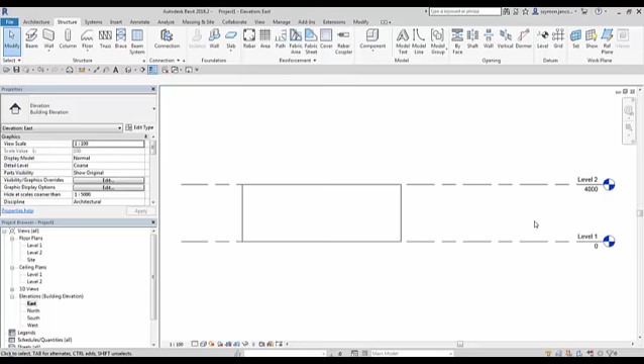In this video tutorial I would like to show you how to create a structural beam. I have drawn 4 walls that are going from level 1 up to level 2, and I will draw structural beam on the level 2 floor plan.

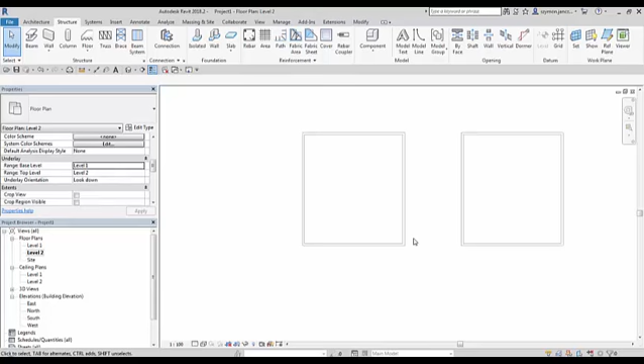I go to structure. Now I see on the view an underlay of level 1, which is listed under here. I can turn it off, but I will turn it on in order to see the walls from which the structural beam will span. So I select the beam, and I see that there's only W shape already loaded into the project.

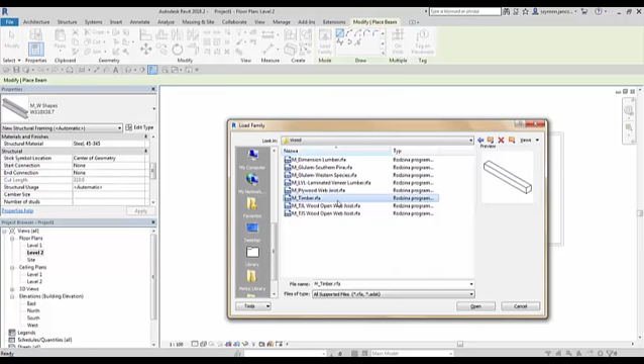So I go to load family and search for structural framing catalog. I go to wood and select M_Timber. The profile is rectangular. I will not pay attention to the precise size of it, so I select a random one and click OK.

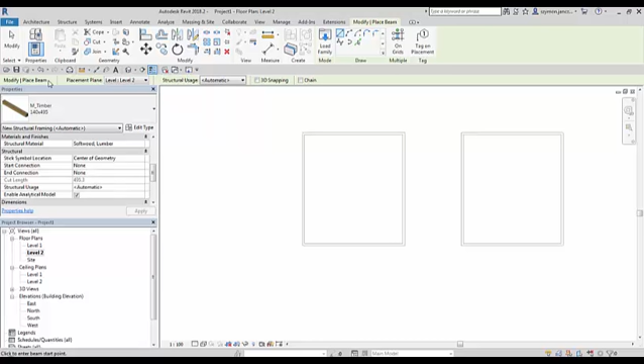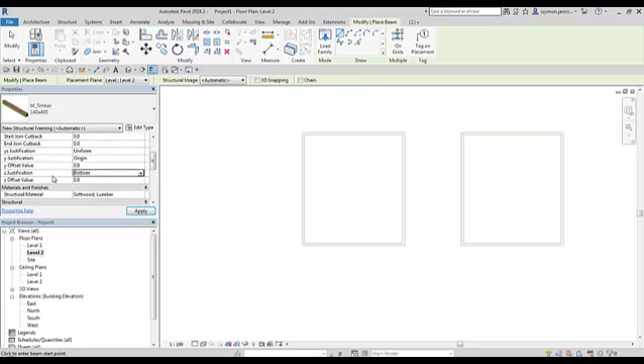Now I pay attention to the placement plane, which is now level 2 as I wanted. So I will draw the first one, but also we can look at the Z justification. We have a Z axis, which is now set to top. We can change it to bottom if you want to draw using this plane, right? So when I click here and go to 3D view, the beam will be like that, you see?

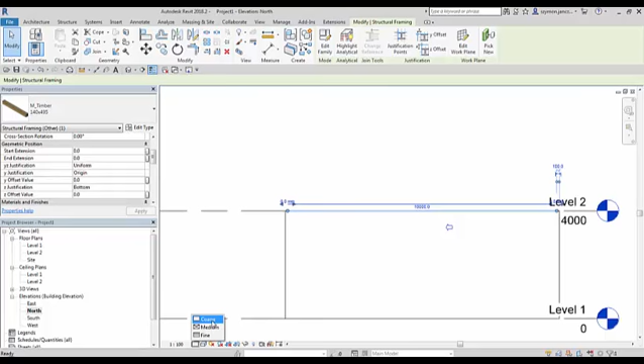If you see only a line, that is because we are in the coarse level of detail. If you change it to medium, we will see the profile. I like to change to shaded view so I can see clearly these two elements. And as I mentioned, there is a Z justification that is often used, and now it's set to bottom. If we change it to something like top, it will go down, right?

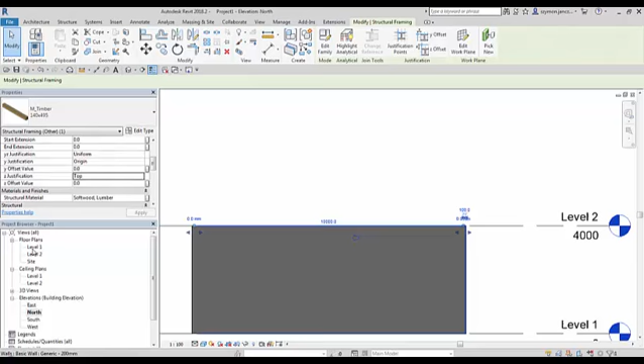When I go back to level 2, you see that this beam is now not there. So when I go to medium level of detail, this beam will appear, but as an underlay. So I guess there is a problem with view range. If I select shortcut VR or search in properties of the floor plan such parameter as view range, I can edit the view depth of this setting.

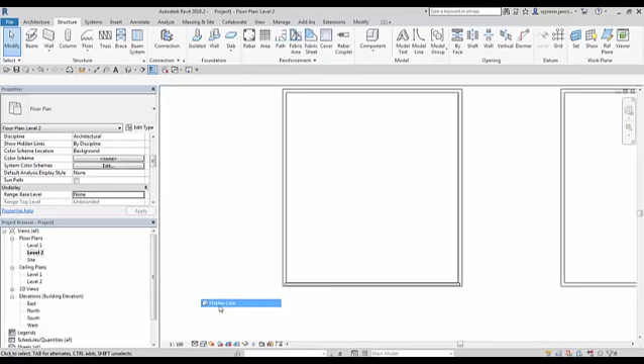When I go unlimited and click apply, nothing will really change because now the underlay is active. But if I turn it off, now these elements are really visible in this view, not as an underlay but as an element.

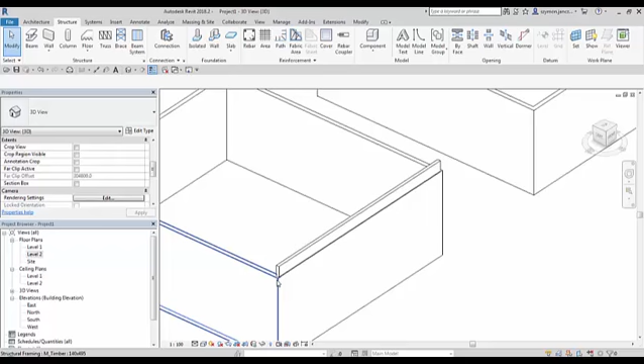Okay, so now we have the first beam, and let's change its Z justification to bottom and look at the shape handles that this beam has at each end. So we have a round shape handle and this triangular one. If I drag this triangular one, the parameter I modify is a cut length. You see, the cut length has changed and increased to 10,100 millimeters.

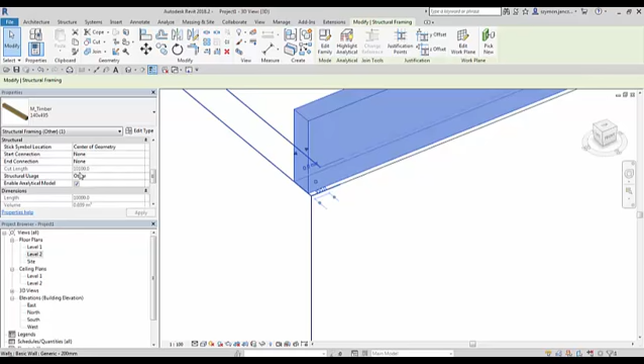If I undo this change, you see it's now 10,000. Redo, 10,100. If I want to modify the length parameter, I would drag this beam, and I would drag this shape handle, round one, right? You see, now this parameter is changing.

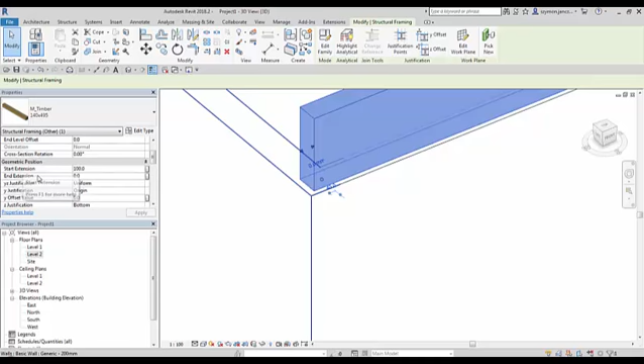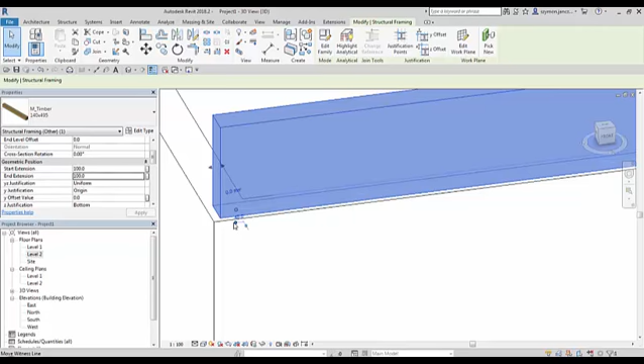By using these triangular shape handles, we are actually modifying start extension and end extension. So if I go here 100, it should also extend 100 millimeters on the other side. Okay, but it's just some details. So the other thing that is modified using these round shape handles is the analytical model, which is used by a structural engineer. So okay, let's go back to modeling.

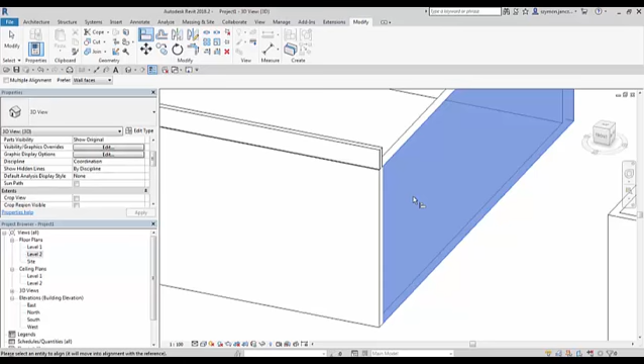I can also change the total length of this beam using an align tool. So I go to align, click on the face of this wall and face of this beam, right? And I will do the same thing with the other one. Once I am satisfied with this beam, how it looks, how it's modeled, I would like to copy it, and I'm doing it using an array tool.

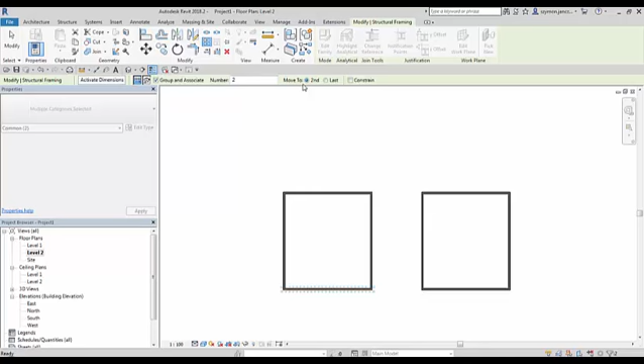I select one beam, go to array, change to last, click there, and now enter how many beams should be in the middle. So let's say 5. So now we have perfectly justified beams.

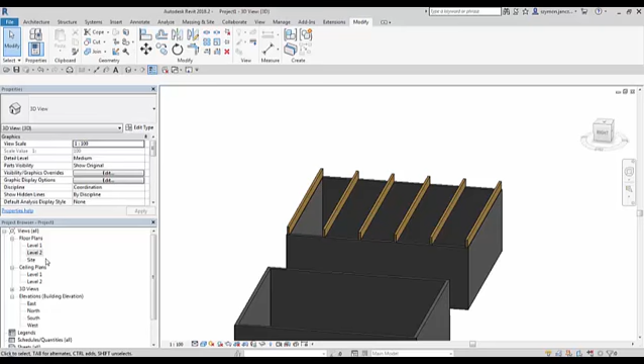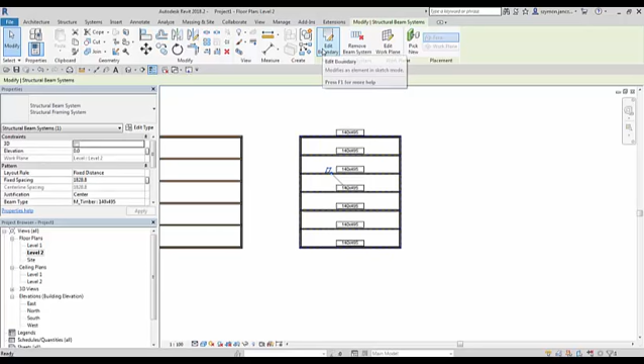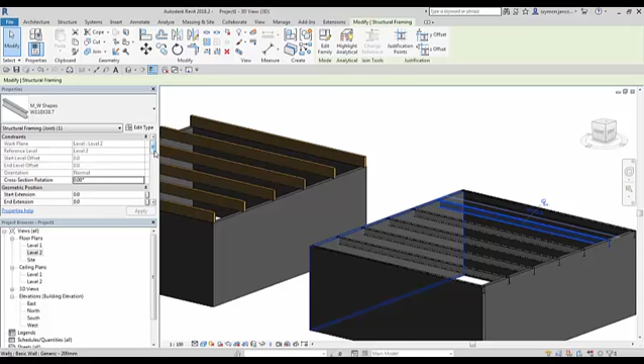The other option would be to use something that is called beam system. I have to draw boundary lines which will go around the walls, and you see now this beam system is created using beam type timber 140, and we can change it to any other type. So there are two ways of doing it. We can also modify each element, for example change its justification.